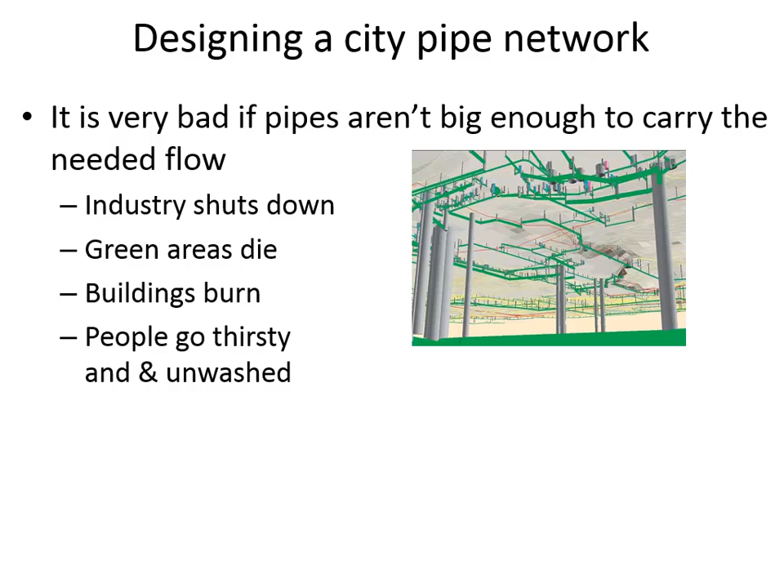Green areas die if it was the summertime in the west. If the water is a no-use order, everybody's lawns would have been just crispy because it doesn't rain enough out in the west for lawns to go unwatered. Now, in the case of Charleston, buildings didn't burn because water was still in the pipes. It just wasn't fit to be used for drinking purposes. But if you undersize a pipe network, then the fire department can't get enough flow out of a hydrant to fight fires. And so it actually becomes not only just a social inconvenience and an economic inconvenience, but it becomes a safety issue as well. And people really suffer when you undersize a pipe network.

Remember that there's a limit to how much suction you can generate. You can only generate enough suction before your pump starts to cavitate. So in theory, maybe if your toilet was at the same elevation as the pipe network, that might matter, but there'd have to be a real special set of circumstances. It wouldn't come out of your toilet because that's open flow, open to the atmosphere, but they might be able to draw some of it out of your pipes, maybe. It's probably far-fetched though.

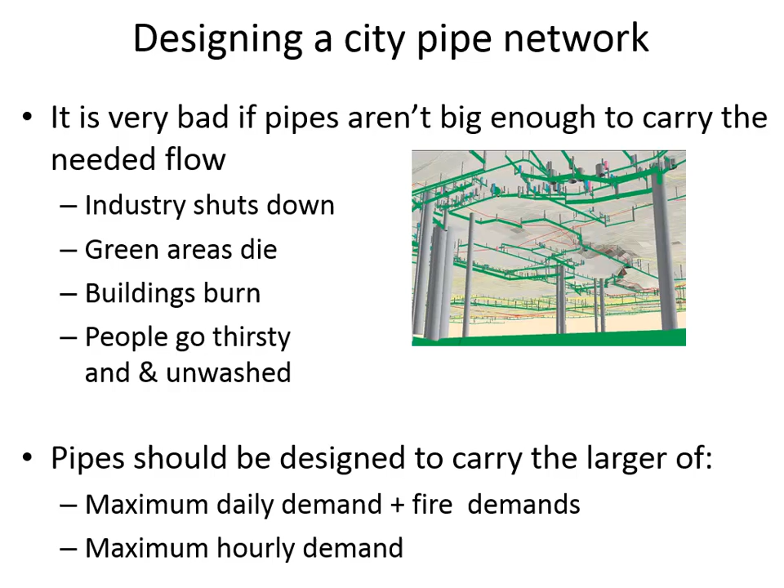So how big should your pipes be? You're going to have to carry the larger of the two design conditions you've just estimated. You've figured out how much you think the maximum daily demand plus fire demand is, so you add the NFF that was provided along with the average daily flow during the maximum day. That's one possibility of how much water is going to be needed. Or you look at the peak hourly demand without the fire flow. So those are the design conditions.

Now, other criteria in the assignment description you have to follow is the pipe network pressure should be between 240 and 850 kilopascals. What is pressurizing that pipe network? Why is it under pressure in the first place? Because of what? Elevation head. How is it getting head? How is the network getting head?

When water comes into just one location, the pressure that you've got here affects the pressure everywhere else. So when you make the pressure bigger here, it will make the pressure bigger everywhere else in the network. The way that you're in the driver's seat as an engineer, you've got some levers you can pull to make the vehicle do what you want it to do, and one of the things you control is where to put the reservoir.

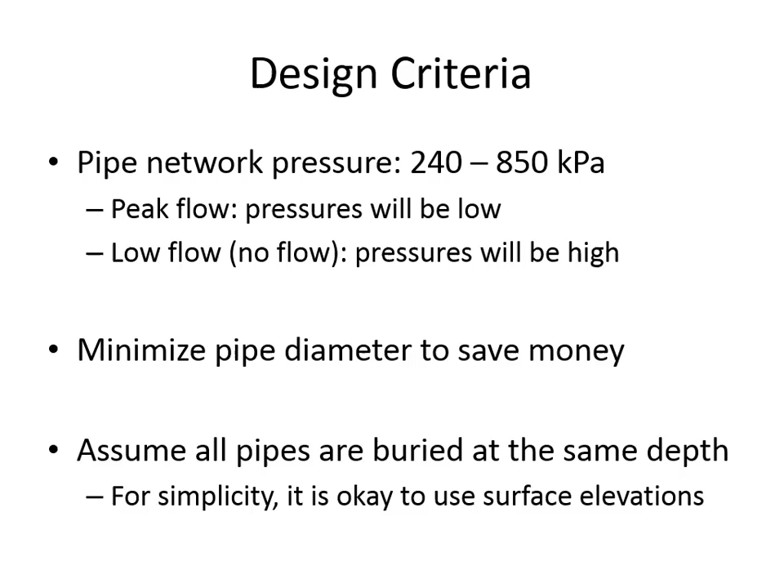One of the things I wanted to show you, even though it doesn't fit exactly in with the content we're covering today, is a result of flow resistance. And that's what we've been talking about with Manning's equation: what happens when a surface resists flow.

There are several different approaches taken to try and characterize the velocity distribution in a channel. Remember that when we've got water flowing downhill, the velocity of the water increases the higher away you get from that surface. So there's some sort of a velocity profile where the velocity of the flow close to the surface is small, and the further away you get from the surface, the velocity increases.

Here's one equation that's been developed to try and approximate what the velocity is as a function of the distance from the bottom of the channel, y, relative to a total depth of flow, d, where d is the whole depth of flow. So if you wanted to find out what the shape of that curve looks like, you can use the von Karman constant and this velocity distribution equation to come up with what the shape looks like.

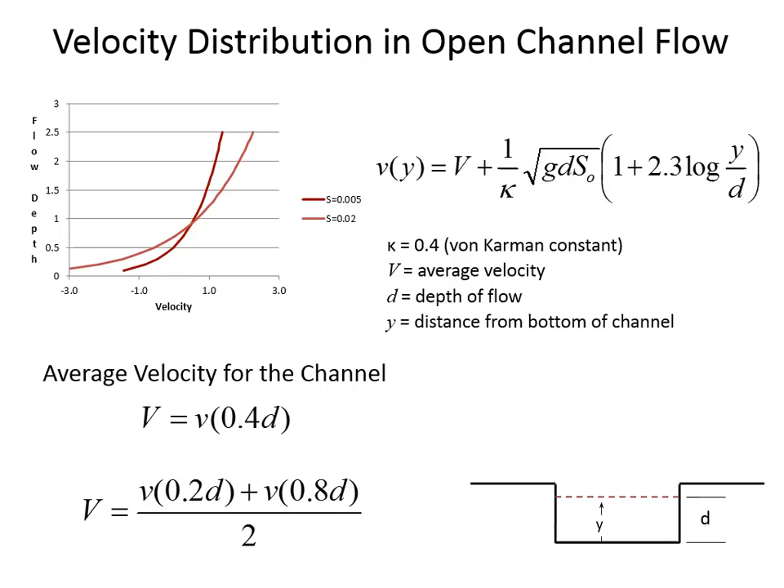Usually the way they measure the velocity at a single point is with what looks like a boat propeller, a little impeller. They put it down into the water and it spins, and there's a reading that comes up on how quickly it's spinning and what that corresponds to in flow velocity. So they'll just take velocity at a couple of depths, and that's how they come up with the average velocity for flow in the channel—measure it at a couple of locations with a physical measurement and then take an average.

Another thing that doesn't quite fit in exactly with what's in the textbook, but is important for you to have a handle on, is what to do when you've got a floodplain and have to come up with a composite or an average n value.

Let's say that flow ordinarily is in this trapezoidal channel, and the material that would be in a main channel might be like compacted clay or concrete or just plain soil. So you'd have one set of n values associated with this trapezoidal channel, but then you're going to have different materials in the floodplain. The floodplain can include grass, weeds, stumps, all sorts of trash, as we've talked about before.

One of the common approaches for coming up with an average n value is the Horton-Einstein method. In this method, you weight the n value based on the wetted perimeter. So for each element, you'd multiply the wetted perimeter of element 1 by the n value of element 1, and then add up all the different pieces.

So you'd take this second part here, and maybe you'd have an average n value for this, where you've got all the trash and weeds and debris, and you'd end up coming up with a weighted average that is based on the wetted perimeter.

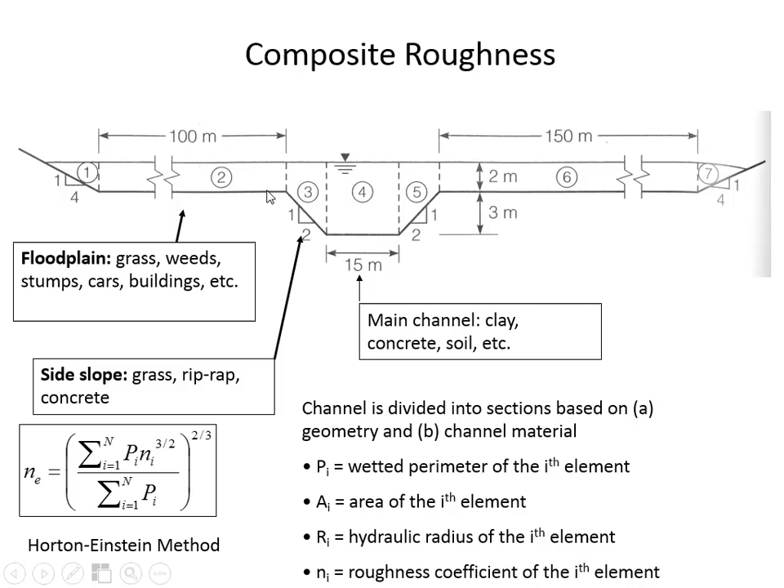There are other approaches that base the n value on area, but the advantage of this method, if you think about it, is that resistance is applied at the surface. So rather than weighting it on an area basis, it really should be weighted on the basis of the wetted perimeter, because it's that contact length that determines how much resistance is applied.

All right, so this is Manning's equation, and if we have a certain n value that we can't change—we're forced to use a certain material—and we've got a given slope, S naught, how is it that you maximize the flow rate based on this equation?

You want to have a big Q, so if you've got a certain n that's fixed, and the slope that's fixed, you want a big Q with a big area and a small wetted perimeter. So the most efficient channel is one that minimizes wetted perimeter.

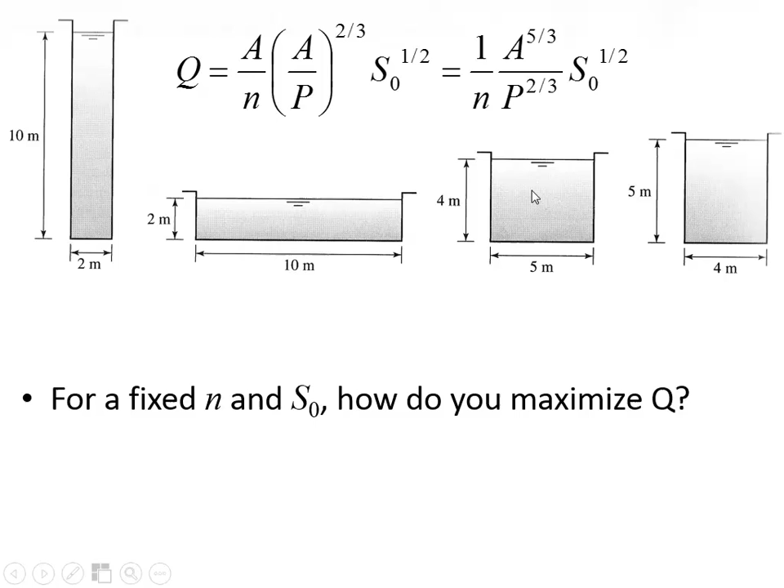So we've got a certain thickness into the water that has the laminar sublayer, and even on top of the laminar layer, there's still resistance. Whereas in the center, it's far away from resistance, so it's going to have more capacity because more of the cross-sectional area is far from resistance.

So let's do a spreadsheet example. I'm going to show you an illustration that just makes this point, showing how we know we can find some cross-section that's best.

So what I'm going to do is have the channel width B, Y is our depth, area, wetted perimeter, hydraulic radius, and then a flow rate in cubic meters per second. For all of these, we're going to have the same slope of 0.01 and the same n value of 0.013.

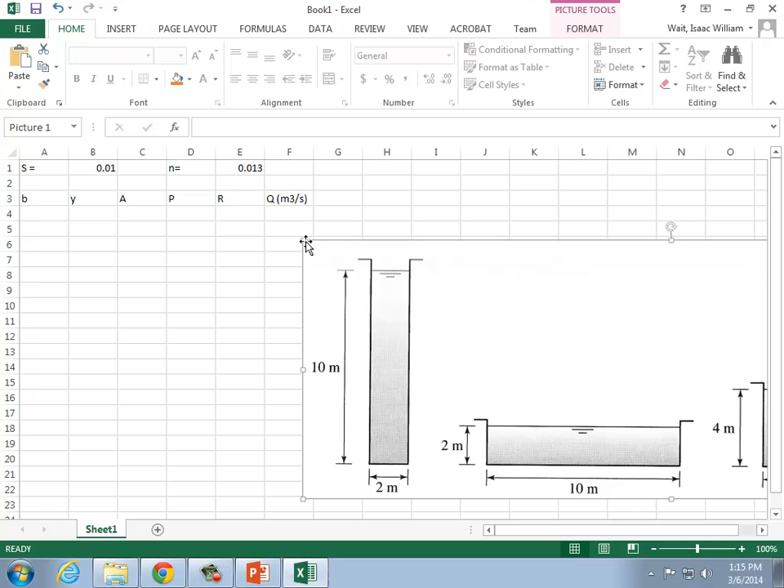Let's go back here, I'll copy this over so I've got these to look at. We're going to have one that is 10 by 2, where the bottom width is 2 meters and the depth of flow was 10 meters. We have one that was 10 by 2 the other way around. We've got a 5 by 4 and a 4 by 5.

I guess if I'm working from left to right, I should say this one was 5 and the 4. Oh okay, there we go.

Okay, so area is just going to be B times Y for each of these. So we're going to see that they all have the same cross-sectional area.

By the way, this process I'm going through right now is very similar to the last homework problem on your assignment. That problem gives you a weird-looking shape, straight on one side and inclined on the other, and you're going to try to minimize how much it costs to build this. The solution I did for that problem is actually a spreadsheet solution where I try lots of different combinations to see what cost is the lowest. So keep in mind this has a direct application to the last homework problem.

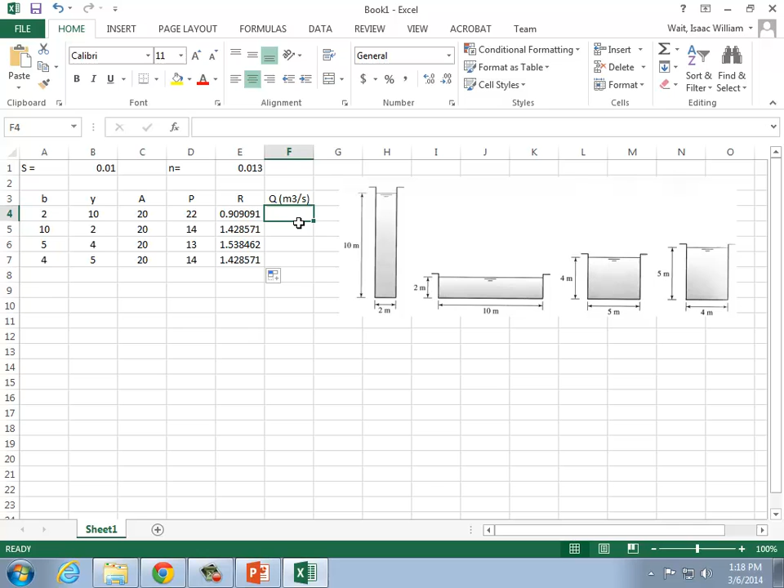So we can carry that through. And then finally, the flow rate is going to be Manning's equation, so I need to type Manning's equation in here. This is what I'm going to be entering in for Manning's equation. I'm going to do the equation on the far right, how I'm going to write it.

So it equals the area to the power of 5/3, times the slope, which I'm anchoring to the 1/2 power, divided by n. I also want to anchor that reference, and then divided by the wetted perimeter to the power of 2/3. Okay, so any questions on Manning's equation, how I've typed that in?

Okay, so now I find out what the capacity of that channel is if it was this 2 meters wide, 10 meters tall. So I can just drag it down and find out that of the options listed, the most efficient is this one, 4 meters depth, 5 meters width. But that's just the most efficient of the options provided. I could probably do a little bit better.

So the way that you maximize flow is by what? In this example, the constraint has been that the cross-sectional area has to be 20. So I'm going to do another one where I'm forcing myself to have a cross-sectional area of 20. So how do I get the best flow rate?

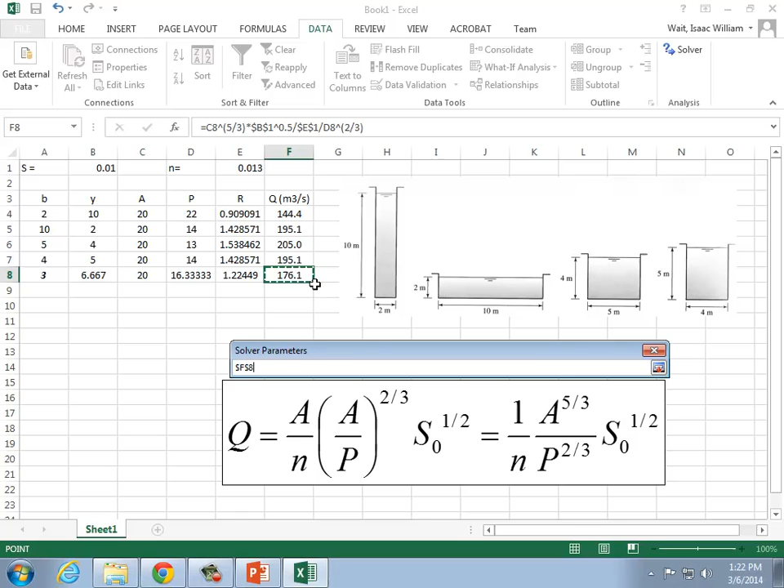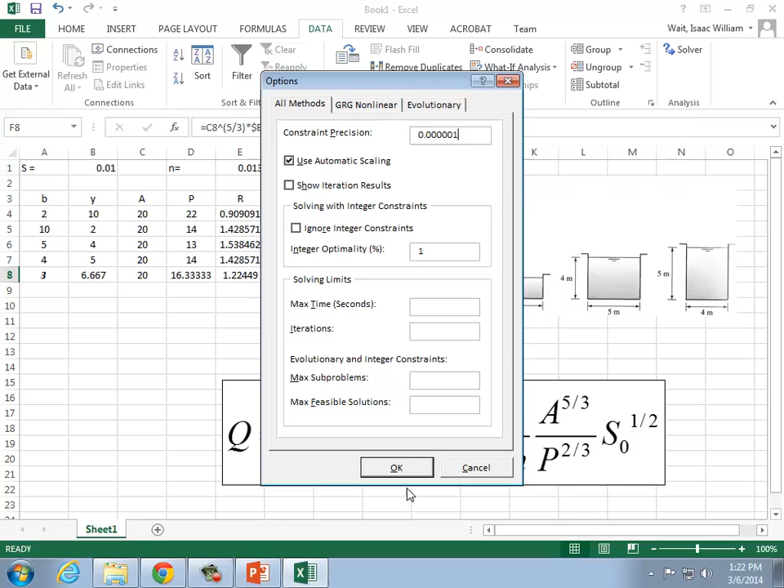Now I go to the Data tab, and instead of what-if analysis, I go to Solver, which is an add-in you have to install separately into Excel. Click that, and it gives me a few more options. Instead of having to know what value I'm going for, my objective is for this flow rate to be maximized. I'm going to tell it to change B in order to make that come about. These other options let you set how close it has to be before the solution converges, but the default is fine here — we don't have to override the convergence criteria.

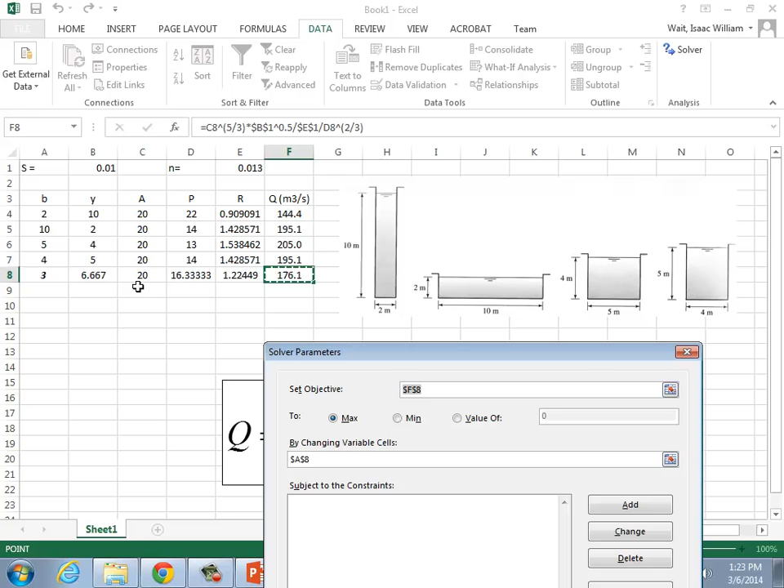So again, we want the objective to be maximized, and it will do that by changing the width. As it changes the width, it's also going to be finding the depth indirectly. So, solve. Let's see what it came up with — we could get 208.8 cubic meters per second. That's the maximum. And what do you notice?

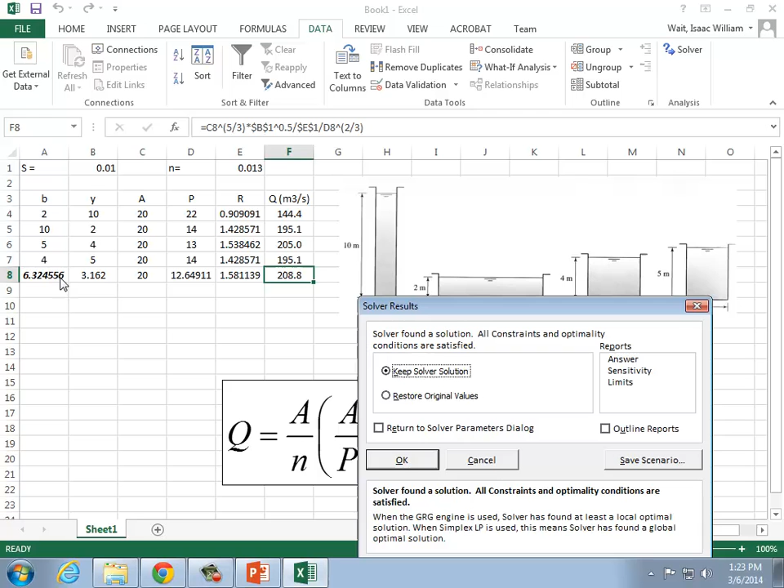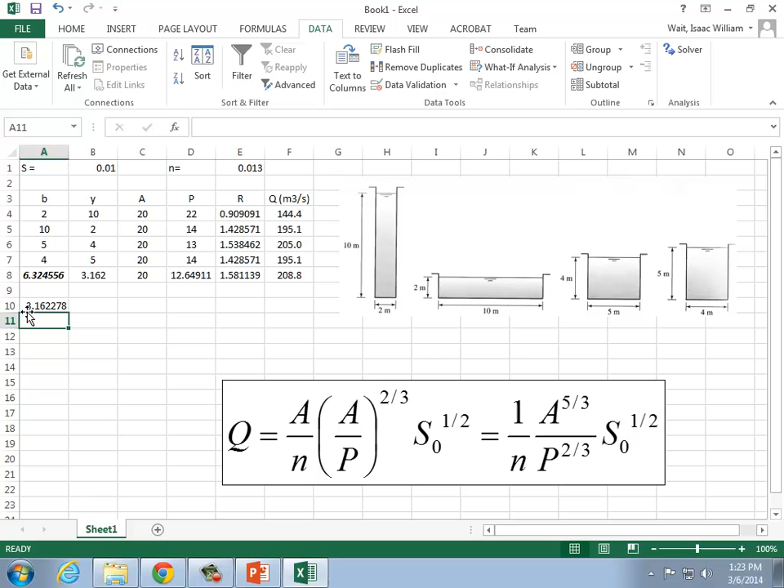The B and the Y — it looks like it's half. Yeah, I'm going to have it keep that solution. Okay, so it's keeping it. So what is B divided by 2? Well, there it is — it's our depth. And so the most efficient rectangle is a half square.

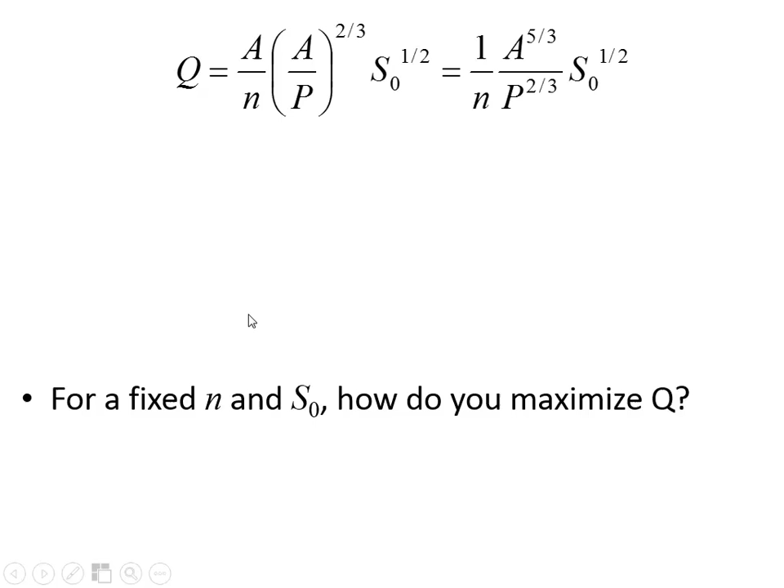That's what we get to on this next slide, which says there are different shapes that have a certain best hydraulic efficiency. Let me jump to this slide here — for a rectangle, the best rectangle is a half square. We'll come back to this in just a minute. Since we mostly do trapezoids, trapezoids are the most common engineered channel. The best trapezoid has a kind of unusual shape because the side slopes are much steeper than ordinarily we'd go for. A pretty common side slope would be 1 vertical for every 2 horizontal.

But root 3 divided by 3 is actually, I think, 0.577, and that ends up being pretty steep for the side slope. So it would only be common for us to go for this best trapezoidal channel if we were working with a concrete lined channel. Usually it's not so critical for us to maximize efficiency that we'd go to all the trouble of making it that shape. But technically, the way you actually get that shape is it's the trapezoid that best approximates a half circle if you draw a circle.

It will intersect the trapezoid at the bottom, in the center, and on the sides as well. The circle — if you think about it, remember what we're trying to do is minimize wetted perimeter — and the circle has the greatest interior area per perimeter of any shape. So the trapezoid that gets closest to approximating the circle is the one that will have the most flow per unit of wetted perimeter.

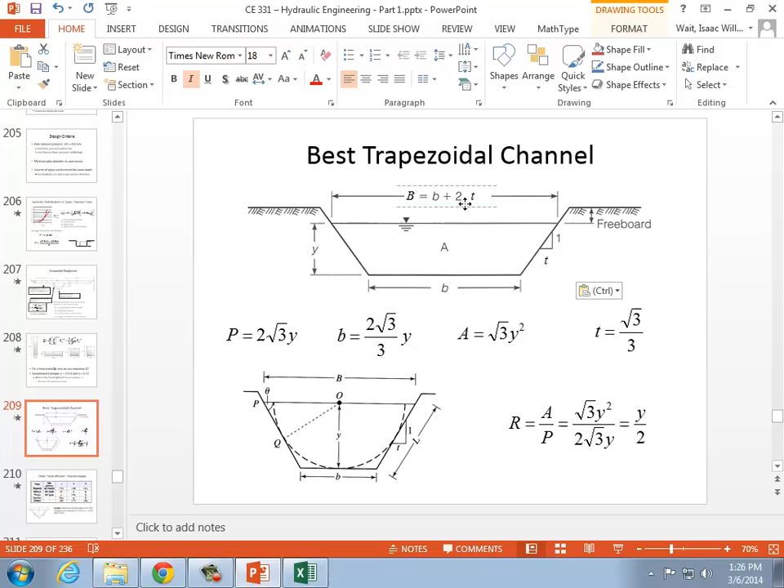So let me just do this. Copy, paste, and put that right back up there. 2 times, what was it? TY. TY. All right, thank you for noticing that. So where it said M for the top width, change that to say T instead.

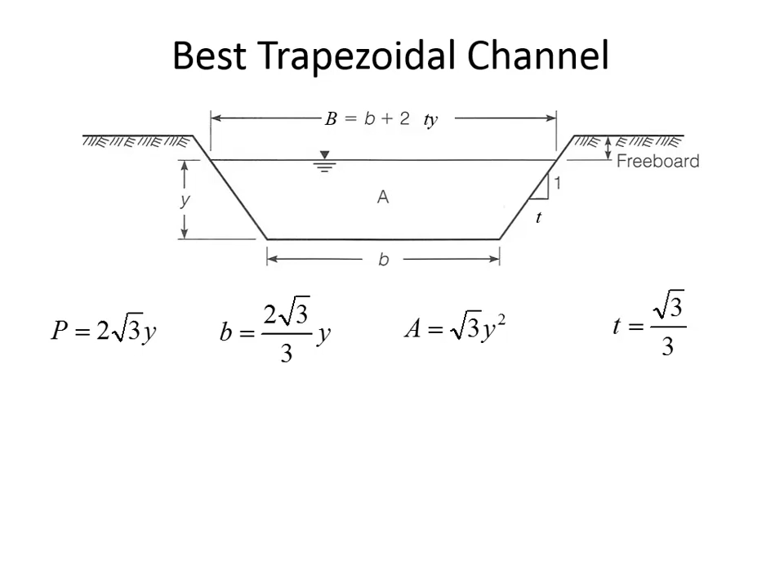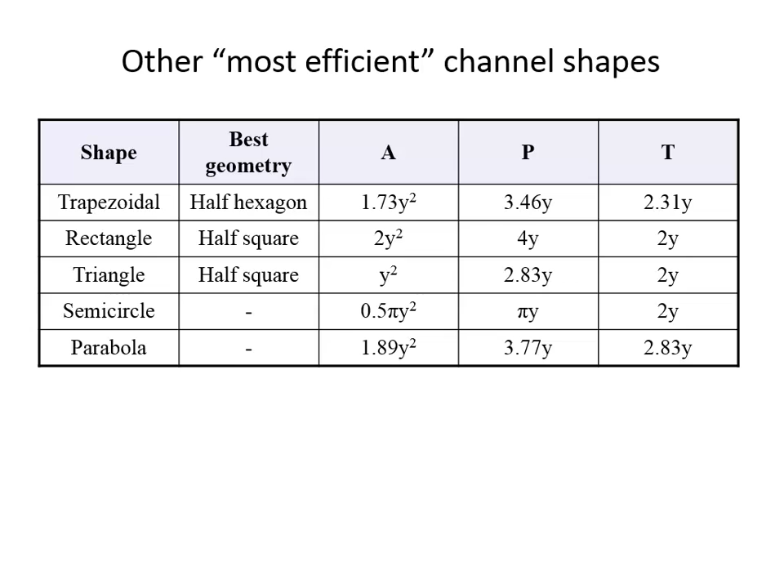So here are some other shapes that are most efficient. And by most efficient, again, what we're going for is the shape that gets closest to the half circle in order to maximize the area that is away from the resistive surface. So here is the best triangle. It is a triangle that has a 90-degree angle down here because it's the one that allows us to put the most of the circle in there.

And let's try this out. This is a combination of best section and Manning's equation. So hopefully you've taken the time to figure out how to solve equations on your calculator, because like I've said before, there's no escaping that need. What will be the flow depth? What is the y if we're going to do the best triangular cross-section, and we know the flow rate that has to be accommodated is 2.5 cubic meters per second? That's what we're trying to convey from point A to point B. We're going to use concrete that has an n value of 0.013, and it's a 1% slope. And so what will be the flow depth?

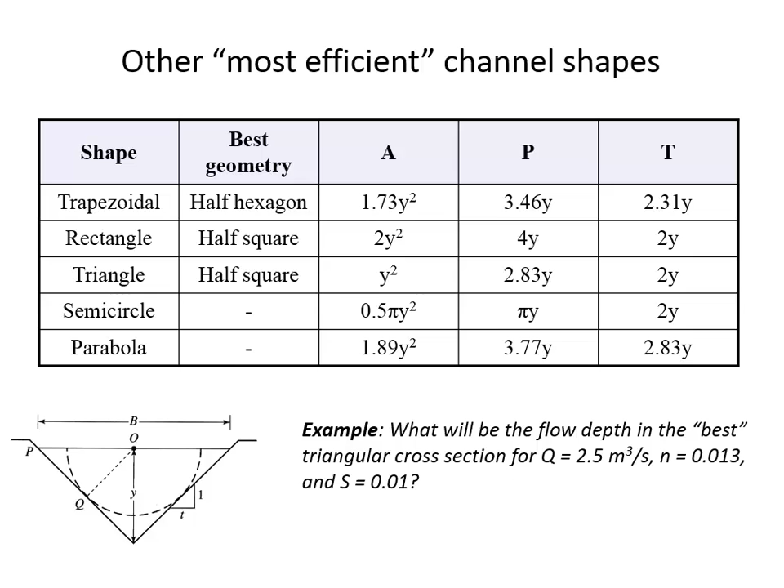So to solve this, use Manning's equation, and here are the formulas you should use for area and wetted perimeter. Use the triangle. Area is y squared, wetted perimeter is 2.83 times y. Feel free to collaborate with your classmates on this as you're working through it. In this, yeah, T is top width, right.

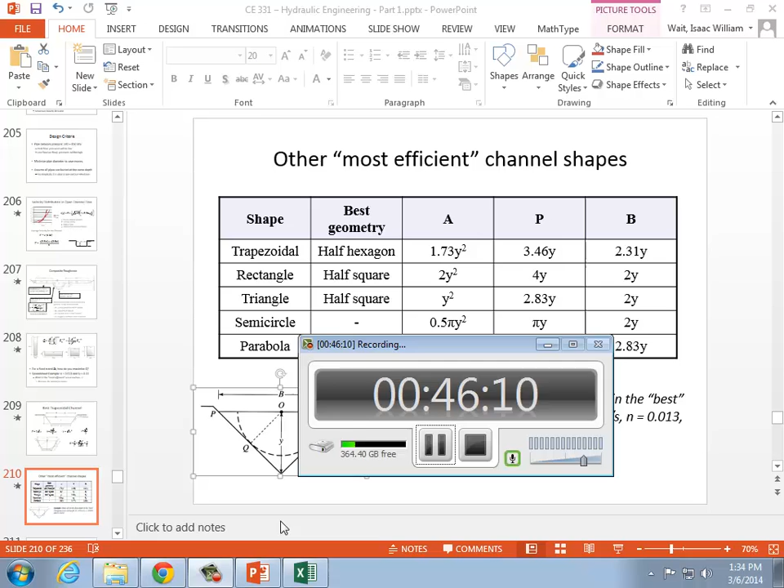All right. So let's take a look at where we're at with this one. We're solving Manning's equation, and we need to substitute in the formula for area and wetted perimeter in terms of the unknown depth. So Manning's equation ordinarily would be A to the 5/3 divided by n times wetted perimeter to the 2/3 power, and then all of that times slope to the 1/2. For the triangle that I've got here, which is going to be a triangle with a 90-degree angle at the bottom, the area is the depth squared, and the wetted perimeter is 2.83 times y. So I just put those formulas directly into Manning's equation, and now I need to find the y value that gives me the right-hand side equal to 2.5 cubic meters per second.

Since one of you asked in a recent lecture, I'm going to force you to look and see what an HP calculator looks like. That's what I use. I don't know if that glare is going to be too bad. Let's see here. All right. This one actually isn't going to use the reverse Polish notation. You can get this emulator. I know they've got it on iPhones as well. This one's called Droid 48. No, you won't. But there's a similar one. The calculator's an HP 48 calculator, and there's probably half a dozen programs that try and simulate what that looks like.

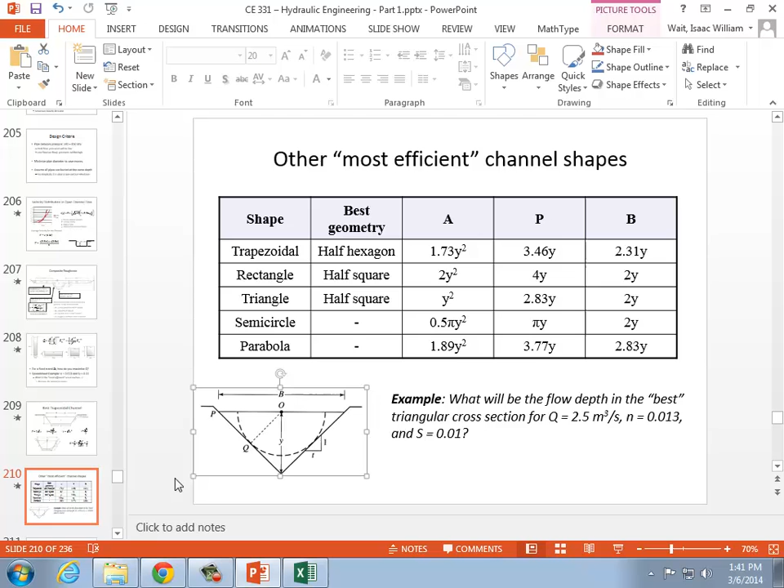All right. So anyways, as you already know, calculator battles get passions rising in engineers. There's nothing that can get fists flying faster than which calculator is better. In my school, it was TI versus HP, and HP had more adherents than TI. But you use what you like. As long as you can solve the equations, I'm happy as a clam. Find the normal depth, and I'll be smiling. So that's all we've got for today.